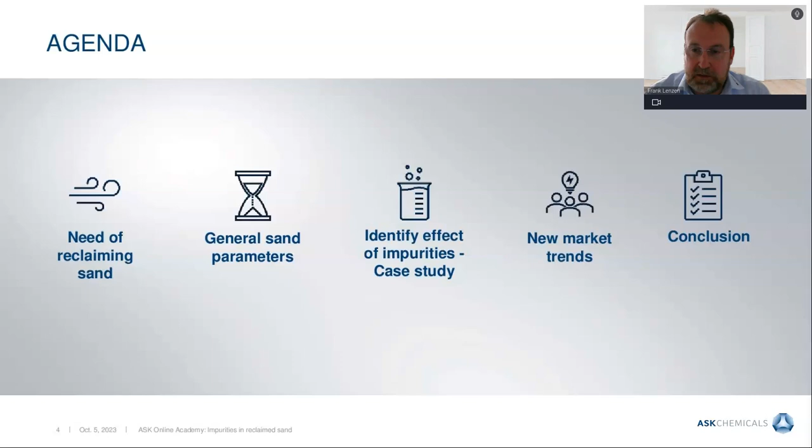So let's start. Why do we need reclaimed sand? What is it used for? For sure, we have worldwide the same situation: raw material prices are increasing, and with the raw material prices, also the transport costs are increasing. So this is a very strong driver to reduce raw materials, use less raw materials, and reduce transport costs.

On the other side, we have this deposit situation in Europe. We have only a small number of abilities to deposit waste sand, and so here also the price is increasing permanently. And also sustainability must be improved. All of you know the CO2 theme, CO2 footprint, and we all try to get a little more sustainable in our processes.

On one side we have these cost and deposit perspectives. On the other side, we also have technical reasons, because already heated and heat-treated sand has benefits, because this typical sand expansion defect is not showing, or was reduced, by using reclaimed sand already. So you can use reclaimed sand also against veining tendency, so we are finally getting better casting results in the best case.

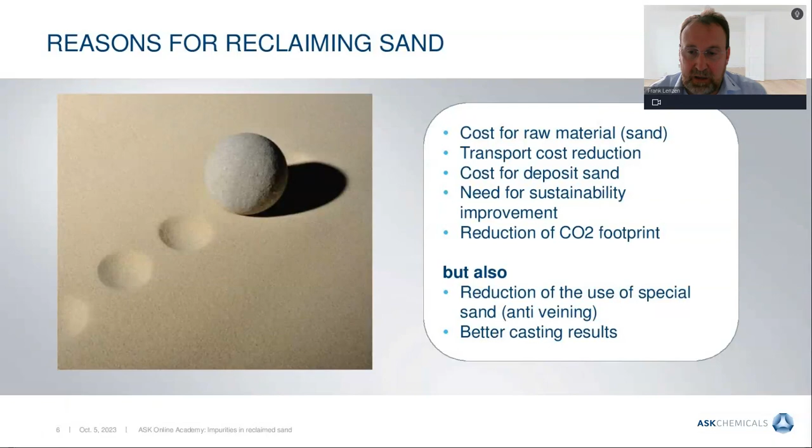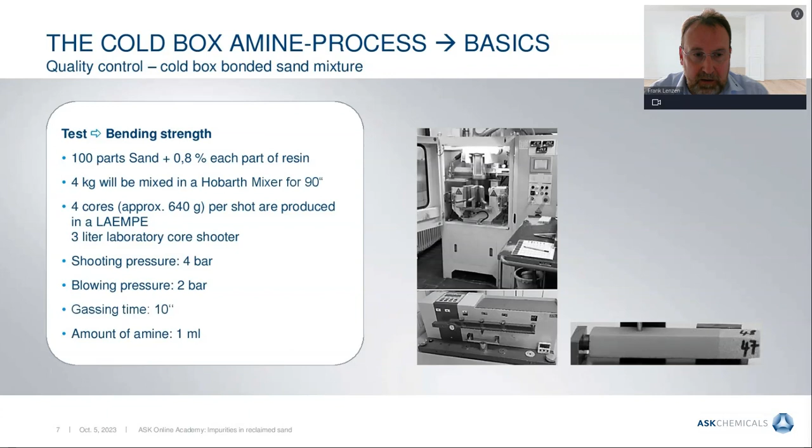The next two slides are only for documentation, especially for the US people. There are graphs coming, and in the next slides, this one and also the next one, the method is described for how these test bars are made. I know you have a different system in the US, so you have an idea why the values or numbers may be a little different than yours. So this is only for documentation.

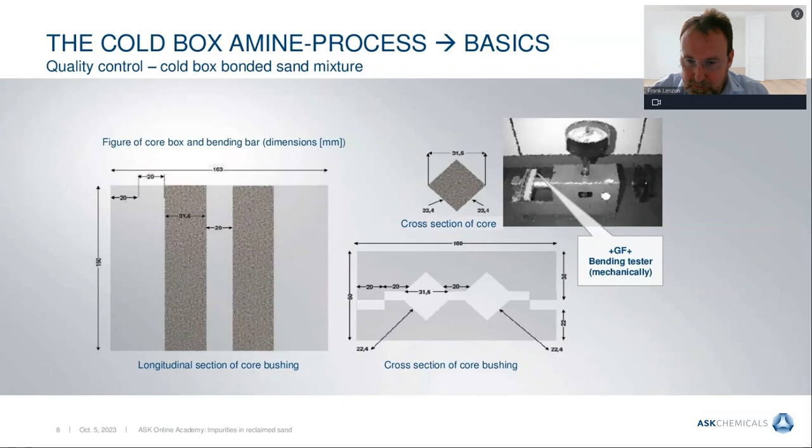So let's look at the general sand parameters. First of all, when you use fresh sand, you also have parameters to look at. Let me discuss a few and their influence on the quality of the core. The first parameter we have here is the pH value.

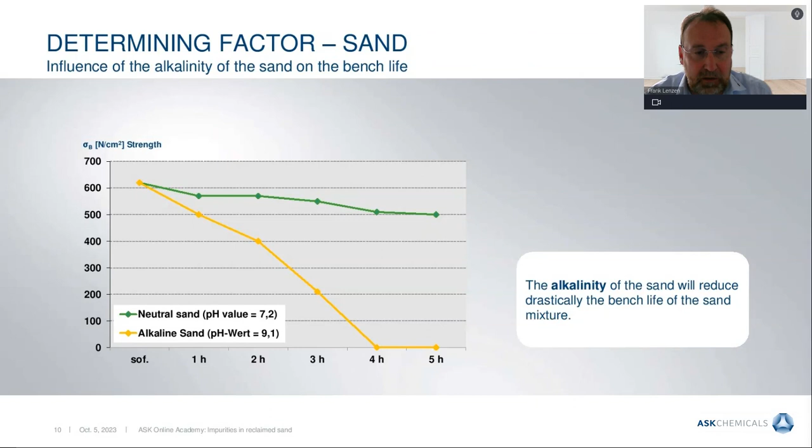So the next parameter is the water content. We are talking here especially about cold box. Cold box has two parts, and the second part is based on isocyanate. Isocyanate is a very strong reacting partner, especially for OH-containing contents like water, so the reaction is quite fast.

You see the green line here - with no water in, you have no big influence on the bench life. But with even the lowest value of water you add, you can see the effect, because water reacts with the isocyanate, and this reduces the ratio between Part 1 and Part 2, and significantly also the bench life.

So you have to prevent water from coming into the system throughout your whole process. Shooting air must be dry, sand must be dry. Also the venting from Part 2, which is usually done with passing silica gel - you have to take care that this is all working well. So water is a quite important point here.

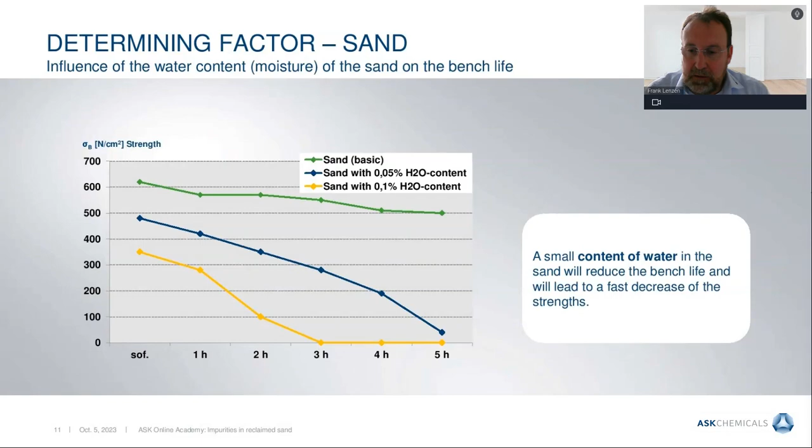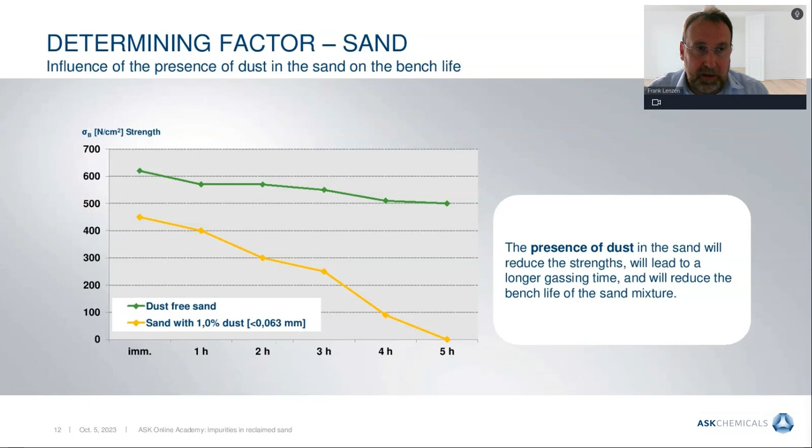So the next parameter is dust. You see that the dust, when we are below or above 1% of the fines here - 0.063, which is the sieve size described here - if you're below 1%, everything is fine. If you're above 1%, you have much more surface, you have different gas permeability, so you're losing strength.

Next parameter is the temperature. Also here, like all chemical reactions, they are sensitive to temperature. The lower the temperature is, the slower the reaction is. So you have to temper your system to appropriate conditions. 20 degrees is recommended by us.

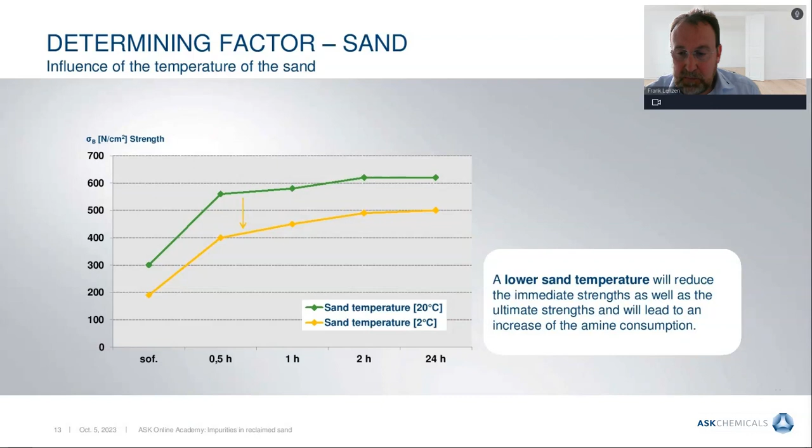So now let's switch to the reclaimed sand, and let's look at the impurities you have in your sand system if you reclaim your sand, and the effect on the sand itself. So what have we done here? We made a case study - we took 50 sand samples from a customer out of the process and ran a lot of analyses on these sand samples.

You see here parameters - chemical parameters, but also strength tests we did with every one of those 50 sand samples. On the right side you see a diagram of one parameter, which is the conductivity, and you see the variation, the normal typical variation in the process of this customer. Each dot is a point we measured with all these parameters.

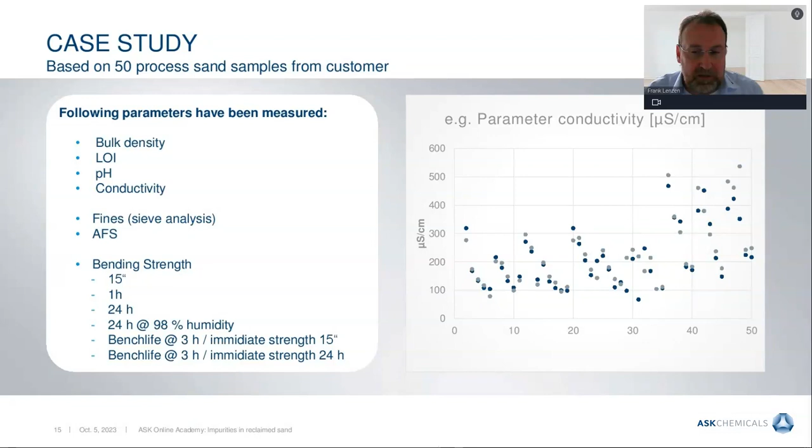The next point was to find out how the parameters are correlating - what is happening with the strength if the pH goes up or down, same with conductivity. So we finally have a diagram which looks like this one here. You don't have to read the whole diagram - I only want to explain what we've done, and that there's a lot of data behind it.

So you see red, blue, and white squares. A blue square here means you have the initial strength after 15 minutes here, and the conductivity here - this means the higher the conductivity is, the lower the strength will be. This is indicated by the blue squares. The red squares, all the way around, mean the higher the strength here, the higher the bench life will be. So there's a direct correlation - in this case, a positive correlation.

So you only have to look at the squares which are colored. This is only to give you an impression of what we've tested and where we found correlations and where not. You see here fines and AFS - there's no color here, so in our case the 50 samples showed no significant correlation between fines and AFS corresponding to the strengths. For sure, if you increase fines to a high level you'd expect an influence, but the fines of all samples here were so low that there was no significant influence we could see.

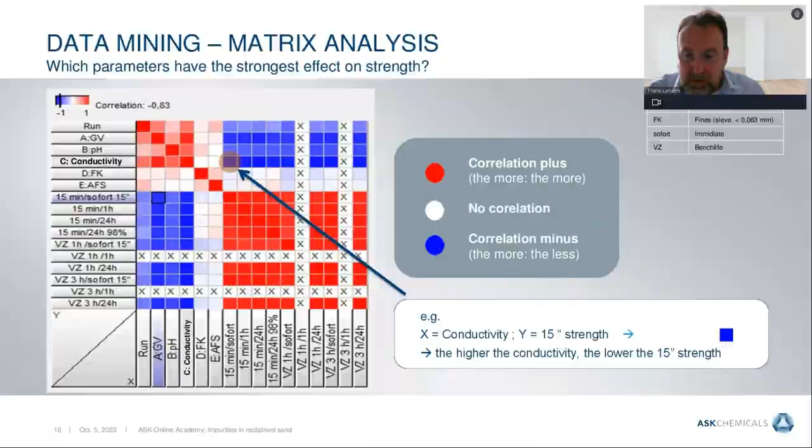So the next parameter here is again based on conductivity. We have the scale from conductivity from 78 to 505 - values we measured from those 50 samples. On the y-axis you see the strength level. Here you can easily see that if you increase the conductivity, the strength level will drop significantly. We're starting here at 200 Newton per square centimeter, and here we are only at 120. So this is a significant correlation between conductivity and strength.

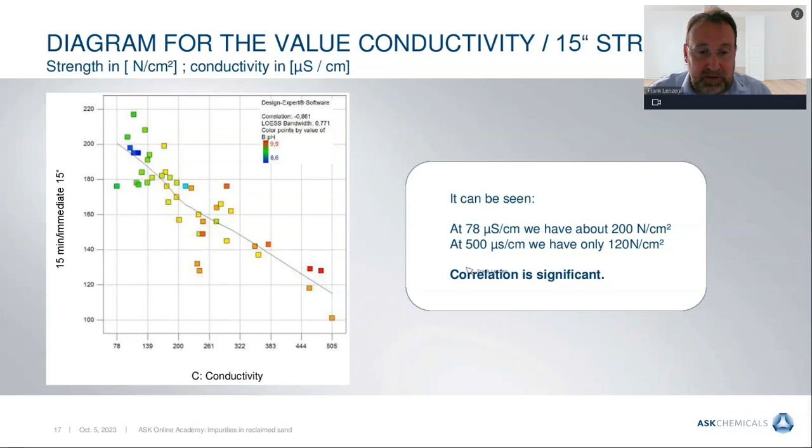Even more, you can see the colors here - they indicate the pH value, where blue is a low pH and red is a high pH. Again, more or less in the red area you have low strength, in the blue area you have high strength. So lower pH is good, higher pH is bad. Again, a correlation - this is part of the summaries we've made and found.

So our main parameters which have an influence on the sand quality of reclaimed sand are conductivity, pH, and LOI - here we have a negative and a very high impact on the strengths. A positive or low impact in our case, based on the 50 samples, are the fines and AFS. Again, this is mainly due to the fact that the fines of all 50 samples were quite low.

Okay, so that's the first small result. Then the second question we asked is: what is causing this high pH and conductivity? What is the reason for those parameters changing from one sample to the next?

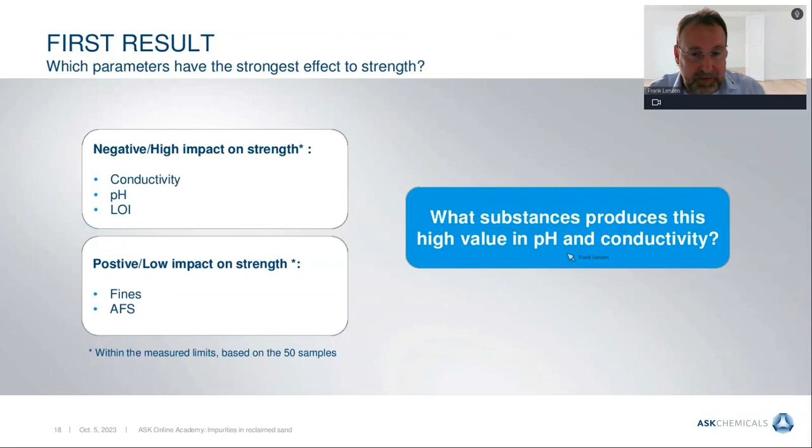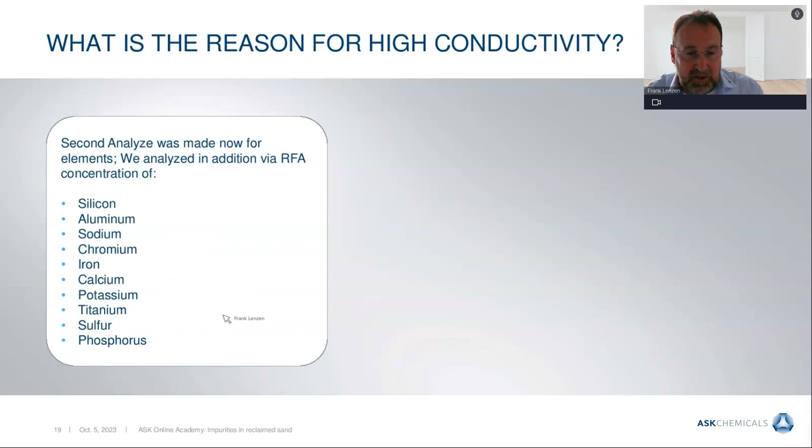So we analyzed further those 50 samples for all these elements, silicon, aluminum, and all the other elements, to look for a correlation between concentration of those elements and the pH, conductivity, and strength behavior. And again, we have this diagram here, same way to read it.

Let's look at the sodium here. Sodium is a blue square, which means the higher the sodium concentration, the lower the strength will be. So this is indicating that it's not a good element, quite easy. On the other side, iron or chrome, you see that the color is fading, nearly white, so the influence is much smaller. On the other side, you have here the red square, so high sodium concentration means also high conductivity.

So what we found is that based on the first experiment, and here we have the second, the highest effect on the strength and quality of reclaimed sand comes from potassium, sodium, calcium, sulfur, and aluminium. Here we have a highly negative effect. So if the concentration of those parameters is high, you will have problems with your quality of reclaimed sand. On the other side, we have parameters which are not playing a big role. Chrome, iron, titan, phosphor are not playing a big role in this case.

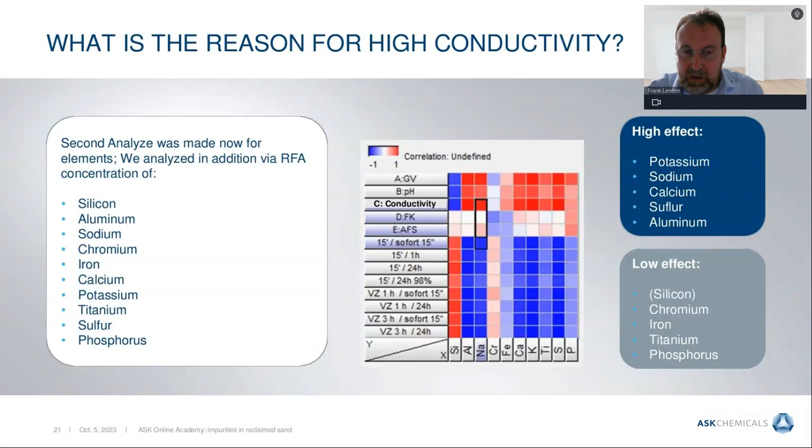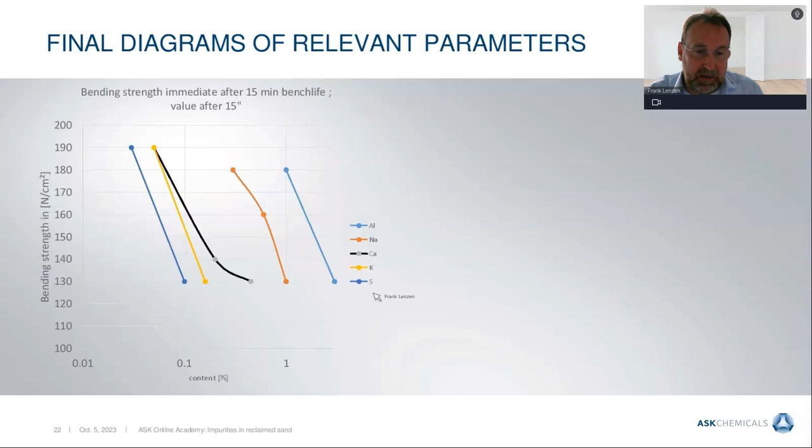So the question then is, where are these elements coming from? And here we found that sulfur, potassium, and also calcium are mainly coming from the riser, from bentonites, so from the green sand side, and also from the water which is used. In our case, there was a lot of agriculture in the surrounding of the foundry, so the fertilizers showed up in the used water.

But usually in the foundry, you're not able to measure all these elements from your sand samples. So how can we correlate these elements and their concentration to a little bit easier to measure parameters? And here we have this correlation. We found that you can measure with a pH value and also the conductivity. You can predict somehow the concentration of the elements, or at least predict the effect of the value on the quality of the sand.

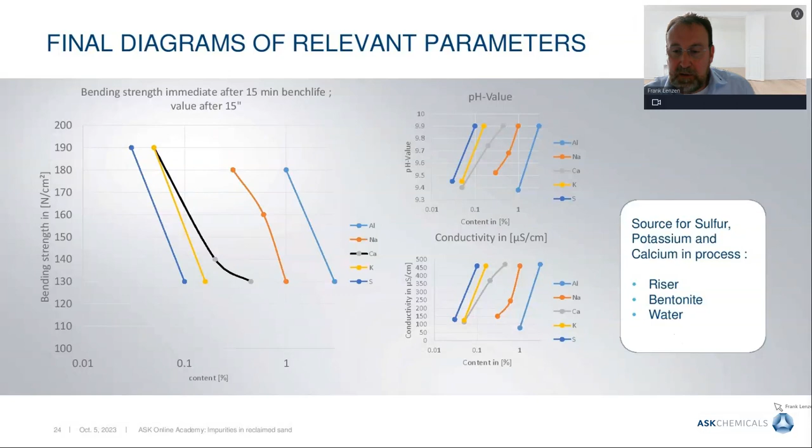So here you can see again the blue line — I think I have it a little bit bigger on the next slide. The blue line with the pH coming from sulfur: with a low concentration, you have a low pH; with a higher concentration, the pH is increasing. So as we've seen on the slide before, sulfur has a big influence. You can see that sulfur is also measurable as a summary value with a pH value. The same with the conductivity.

So what have we learned here? You can use the pH value and the conductivity as very good parameters to predict the quality of the reclaimed sands, because these parameters allow prediction of impurities.

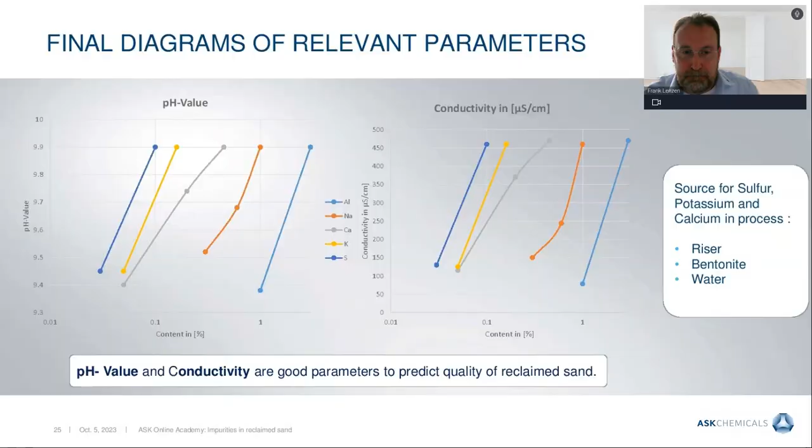And here ASK can help. We can adjust this point depending on the quality of your reclaimed sand. So again, pH value and conductivity are very good control parameters.

As I said, we are able to help you from ASK side by adapting our binder systems to your conditions, but also here we have limits, especially when you have changing qualities. So one of the targets of using reclaimed sand is to have a constant quality — not discussing the pH and conductivity level specifically, but you have to have constant conditions, because then we are able to help you with the binder system. If you have big variations, this cannot be compensated by the binder.

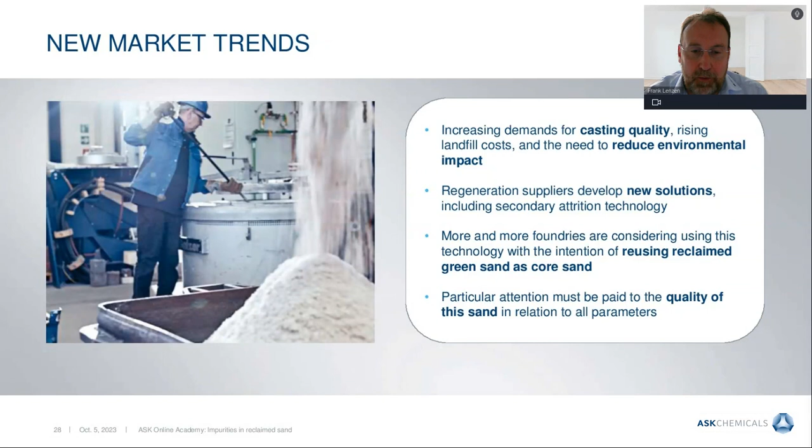So this technology works well, but again, you cannot blind trust these systems. You have to control and check your quality, especially the parameters I've talked about, to be able to adjust your system and keep stable, constant quality. It's the only way to work well, with good quality, with the lowest addition levels with your reclaimed sand. Addition levels is the next point.

So where can ASK help here? Let me talk about a case. We have a customer who has implemented a new recycling system, and his question was: can you deliver a system which can work with a higher volume of reclaimed sand? So we compared the actual used system with one of our newest systems, in our case, EcoCure Blue Pro.

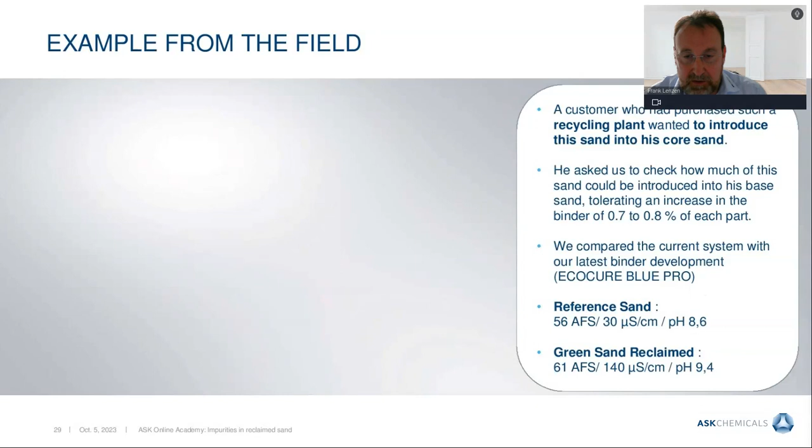So this is a diagram, you don't have to read it completely, I'll explain it. On the left, in blue, is the HE system, the common system they're using, pure sand, no reclaimed sand. The further you go right, the more reclaimed sand is used. On the far right, you have 100% reclaimed sand. The green system is the new one.

At this point, the blue system, 240 Newton per square centimeter, with a mixture of 40% reclaimed and 60% reference sand, is where the customer is working very well. This is the blue bar here. The orange line indicates their actual level of strength they usually work with.

As you can see, if you use EcoCure Blue Pro, we still have this 220 Newton per square centimeter. But with the green bar, we reach this orange line at 80% reclaimed sand and 20% reference sand. So we're able to significantly increase the amount of reclaimed sand we can use here with this change of binder system, from the HE system to the Blue Pro system.

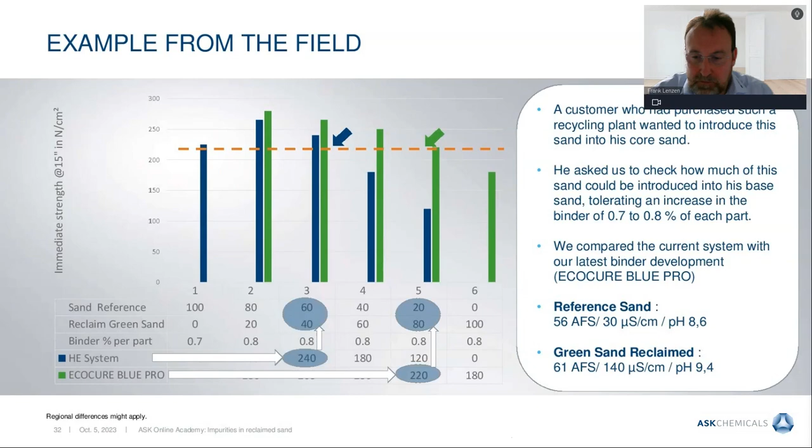So we're able to double the volume of reclaimed sand at the same strength level, and I think this is enormous. This is a real example from a customer, it's not a lab trial. So again, this is the way ASK can help you, we can adapt our binder systems to your system.

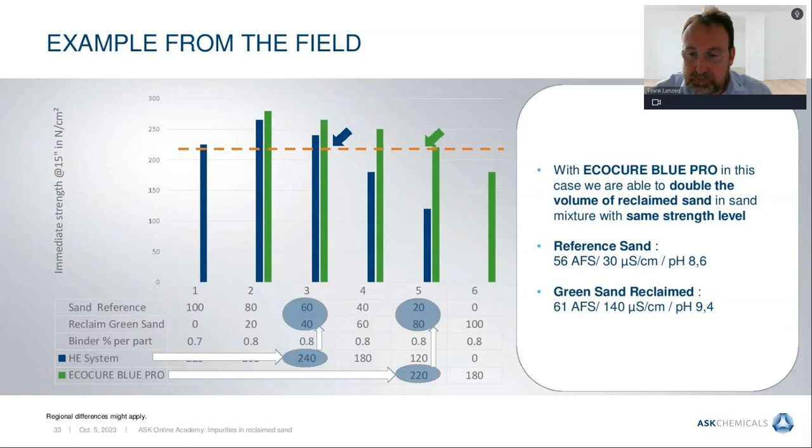So, recommendation: first of all, you should use modern reclamation systems. If you start with reclamation, look around at what is on the market, there are quite good systems. But again, keep in mind that you also have to control and monitor the parameters to define the quality of your sand.

If you have this constant quality with modern equipment, we can adapt the binder system to your sand and to your conductivity limits. Again, if you have pH significantly above 10, we are not able to compensate with the binders, so you have to have, let's say, 9.3 to 9.5. This can be adjusted—it's not preferred, but we can adjust it.

So that you finally have good quality in production. And please keep in mind, there are also new regulations coming on the emission side, so the target must be reducing the binder level to a minimum. Here we can help, in combination with a good reclamation system, a good binder system, under constant sand quality conditions.

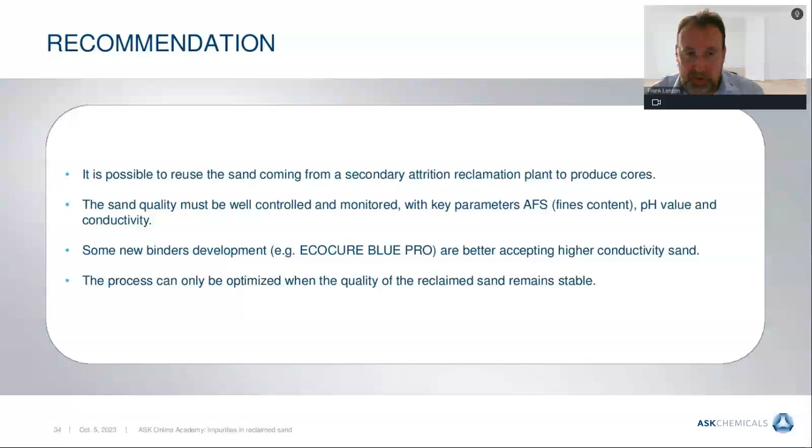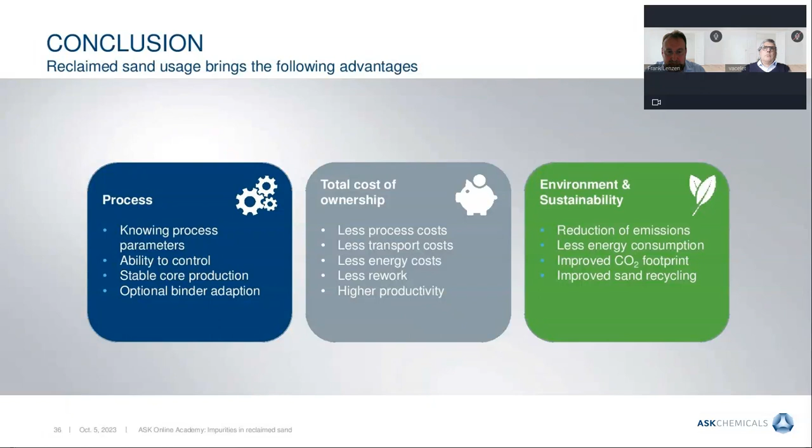Sustainability, I've talked about. Again, this reduction of emissions will become more and more important. We have new regulations coming up, you have to be aware of this. The energy consumption will be significantly lower because if you have less core breakage, this will also influence energy consumption. The CO2 footprint will be better, and we have less waste to throw away. So a lot of positive effects on the environmental side.

I think this theme is worldwide active. We have about 200, a little bit more, participants in this webinar, so it's of worldwide interest to work here in reclaiming systems.

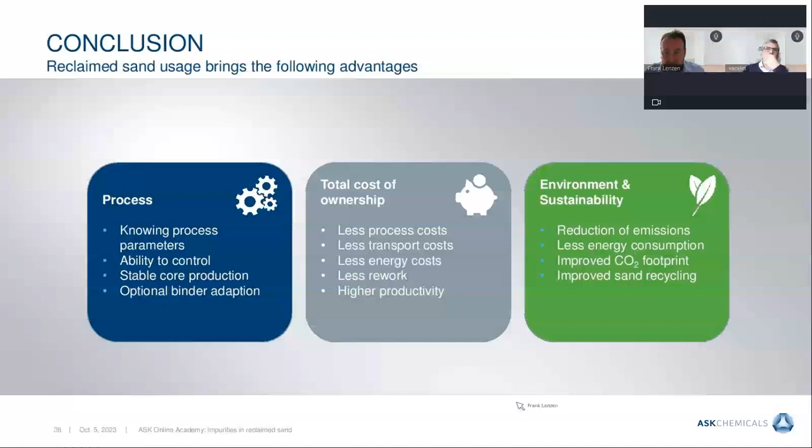First question: what is the best reclamation system, mechanical or thermal? It's a hard question because it depends. We talked about cold box. There are a lot of different systems on the market. I know thermal reclaimed sand from customers which has better quality than the silica sand put into the process, so it depends how you handle this. There's no preference — you have to look at your process and the cost you want to invest. Thermal systems also have a negative influence on the CO2 footprint because you have to burn gas for the heat treatment, so you have to keep that in mind.